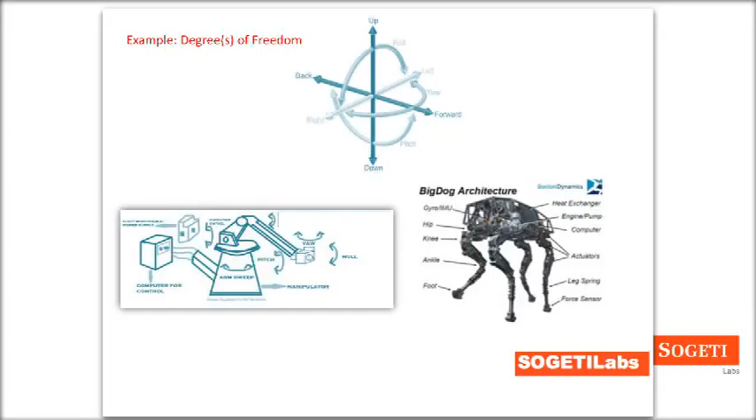But only 40, 50 years later, we have something like this BigDog architecture from Boston Dynamics, where this thing is basically a mock-up of a horse or a camel, a cross between creatures that can autonomously cover vast kilometers, carrying massive amounts of load. It has a gyro, knees, ankles and feet, and it can even negotiate itself on a frozen lake, keep from falling based on its sensors and pumps, and it's a very complex computer with very complex code.

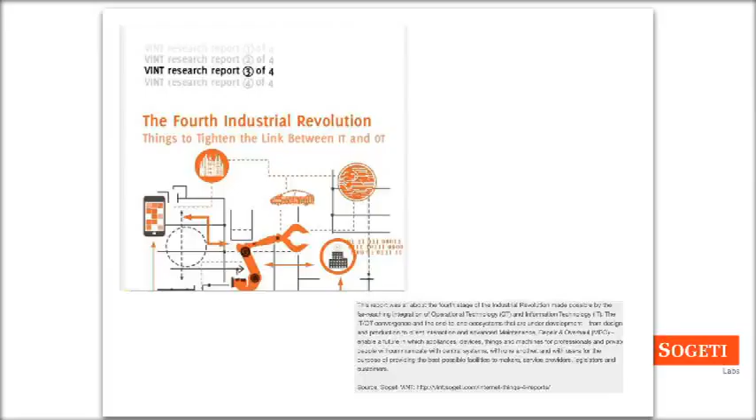A colleague of ours comes with this idea, which I think is fair, that technology is coming more to an invisible and intelligent way, seamless in the Internet of Things. But robots are kind of unique here - they're not going to be invisible at all. They certainly are going to be intelligent, and they certainly will be personal agents very related to the human side of things.

We're going to be using computers - it's really estimated that basically everyone will have a robot within 10 years, if you don't already. And these things will be pretty prevalent. So if you look at this from a TechnoVision point of view - TechnoVision is a way of looking at technology and grouping it.

Looking at the SogetiLabs Capgemini, the placing of robotics is kind of tough. It fits in the human experience side and the people side, because we certainly will be collaborating with robots. But robotics also really can be kind of taking...

Hang on, we have comments that... falling apart. Can we dial back a second? Can you restart from Technovision, see how we're doing? Yeah, no, sure. All of us slowed down as well. I think if I talk a bit clearer, that would be better.

So, placing robotics along this array of Technovision, which is a way of looking at technologies from both Capgemini and SogetiLabs together, we see that robotics can't really be placed into one particular corner, except for the possibility that it's not an invisible infrastructure, as I mentioned. It certainly is a system. It will be thriving on data. It will utilize a lot of data.

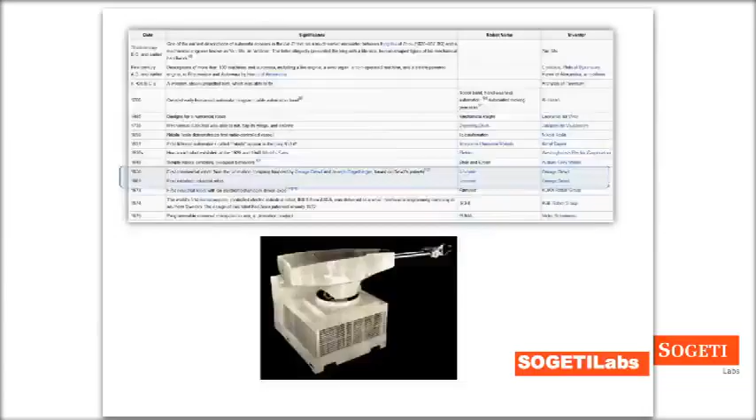Robots reach an AI capability... I think you're moving the slides back. Somebody's moving the slides back. Hang on, not me, really it's not me. I thought this was an interesting webinar, so I thought let's liven this up a little further. No, here you go, back to the slides. Please, somebody's pushing the slide buttons. Please don't push the slide buttons. That's okay, whoever's pushing it, maybe it's a robot.

Anyway, basically the robotics, certainly I place this in the UX experience. We certainly have a collaboration with these kinds of technologies, and this is very important to know. Of course, these things are designed for digital, but they're also very physical as well. So robots combine mechanical engineering, electrical engineering, and IT computer science engineering, and that's where the testing gets very interesting.

Next slide, please. So let's look at some of the testing challenges. This is an old look at the Elektro the Moto-Man back in '37, '38. What's funny about this is for the quality management of that system, where we'd be testing it, checking its quality, or looking at methods and processes, there's not too much different here than some of the more leading humanoid robots around today. There were motion sensors they postulated. The thing about smoking maybe wasn't as politically correct back then, so that was enough of a hassle. There were shafts. What they didn't quite understand would be the actual software and computers running this thing. This was purely a mechanical thing.

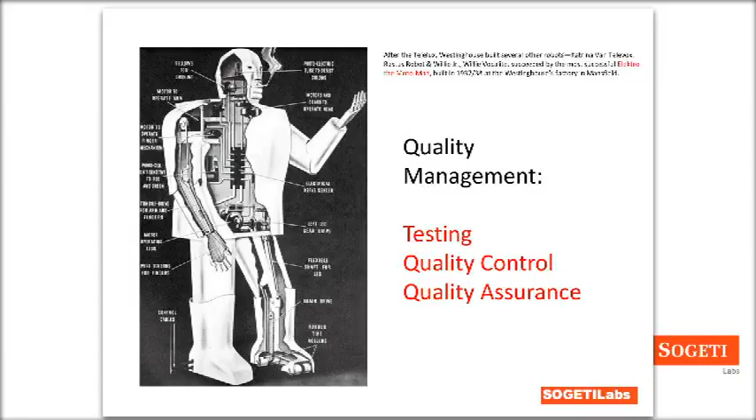Let's move to the next slide. So at Sogeti, we're no strangers to testing. We've devised processes for testing software. TMap is one, and I'd say TMap is a wonderful process, describing setting up phases in testing, where you have to plan your testing, prepare, specify, execute, and complete. But this kind of testing, along with business-driven and the toolbox, slightly falls short. I kind of place it with the 1927 picture of the robot. We understand processes and how to test. Robotics would require this as one dimension.

So this is certainly a valid dimension, TMap Next. A very important part is still the kind of thing you'll need to do when you test robotics. You'll need to check against specifications. But the thing is, it's not just a phased approach, it becomes very iterative, if not daily. Teams that work on robots at these, robots become almost like children, right? Everyone is working on one. Teams are working together for that one robot.

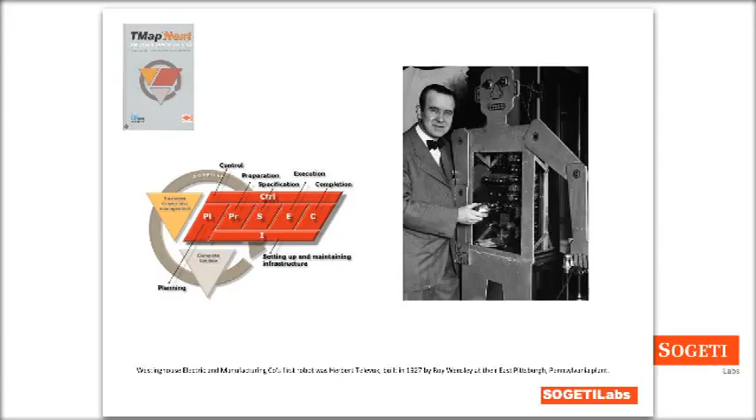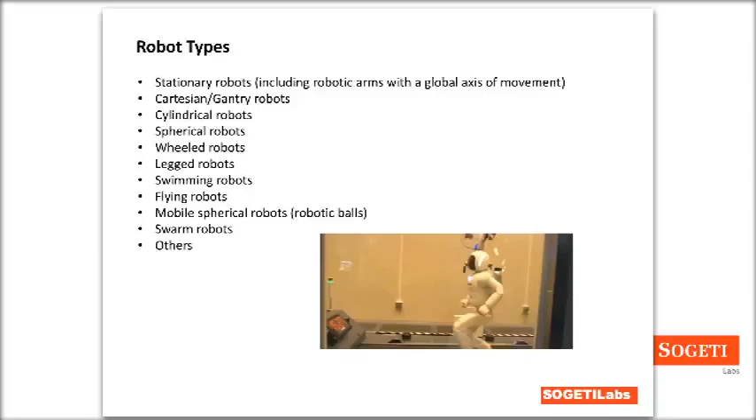You see robots have quite a lot of interesting elements. They have effectors, usually pneumatics or hydraulics or engines of some kind. They have sensors, so they know when they get data from their surrounding area. And keep in mind, they have something like software - this is where my IT testing comes to mind.

If I were on a robotics team, I suppose I could help with at least the third area. I'm not a pneumatic specialist, I'm not a specialist in sensors - I could learn that. But I certainly could test the brains of the robot, or perhaps today my brains need a bit of testing here.

What's interesting is that the Honda Corporation kept Asimo, that autonomous robot you see there, a secret for 10 years. No one knew about these labs, these testing areas. It's because they didn't want to get embarrassed with their failures, and also because they wanted to make the ERATO grants - interesting because with an aging population like in Japan, robots with human interaction are going to become more and more important.

Labor is very expensive, and the population is aging over the years - not passing away, but graying. The Japanese government has a Japan Science and Technology Corporation grant, giving grants to big companies to do this kind of robotic research. So there's money in robotics.

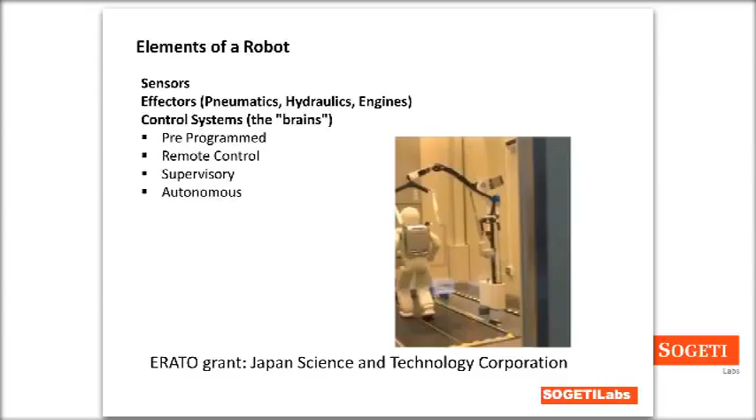Let's take a look at this interesting robot. Eric, unfortunately since I gave you the PDF, I have many more slides here for this robot, so you guys won't be able to see what I wanted to show you in my PowerPoint slide animations, but this is in fact Festo's BionicKangaroo.

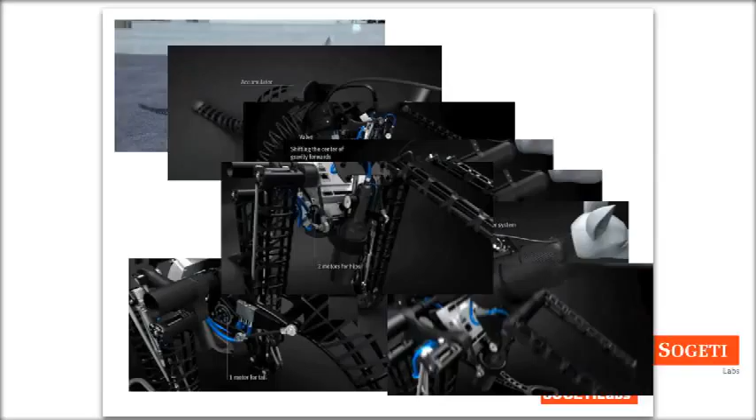Here you see some of the slides I wanted to show you. You see motors for its hips, you see the valves.

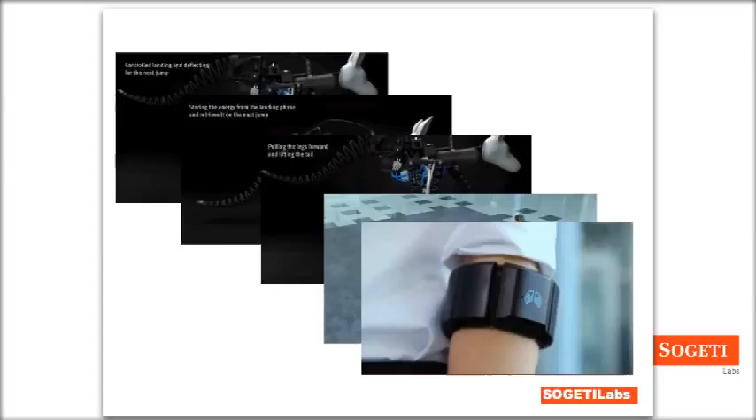The point to be made here is that the way we'll test these systems, and have to test these systems, is gradually, very iteratively. It's as if the different versions, like if you were testing software, if you were testing this version of this robot, you have to go through an evolution in itself.

Okay, let's go next. Yes, the sound's going to go in and out. Yeah, the sound is better now. Also, I disabled my fully automated backup solution to the cloud from uploading a couple of gigabytes while we were doing a webinar, so that maybe helps too. Keep going. Yeah, maybe we'll just avoid using the bandwidth. Sorry for any challenges in audio, folks.

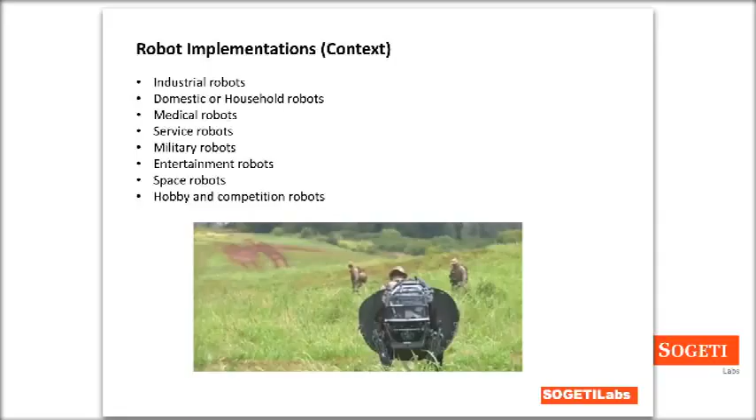Let's go a bit further. What robots do is the 3Ds: the dirty, the dangerous, and the dull work. Some people might think robots are depressing, or that they do the demanding work. But I think robots will be doing daring and dynamic work in the future, if not very interesting stuff, very human stuff, interacting with people.

Maybe you saw the situations in Paris. Maybe it'll be robots who will be helping to go in and take out bad people, or maybe it will be robots that will be helping us in the store, or helping us at the hospital, and this kind of thing. Okay, next.

So, since this is about testing, I'm not going to go into whether robots are good or bad, although that's a really fun discussion. Certainly, Asimov saw it as a step in mankind's ongoing advance. Is it something like here you see - I don't know if you saw Interstellar, but there's an incredible robot there in the film that plays a key part.

This is a very interesting robot rover on Mars, which is still working for humanity out there, finding stuff. There's lots of incredible technological advances. Testing this kind of thing would require the sciences backing up what those things are recovering. So you're not only going to have mechanical, electrical, and computer engineers testing this, you're going to have biologists and physicists and scientists programming to look for certain signs of life or certain things.

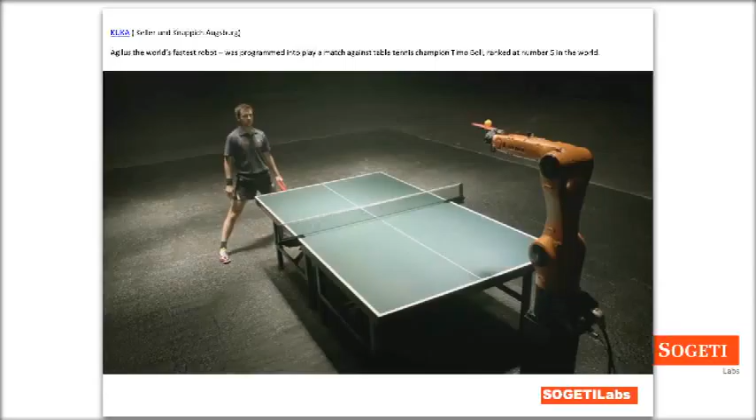That's where the robot started, that little arm back in 1958. And now with KUKA and Keller und Knappich Augsburg, this is Agilus, the world's fastest robot, which is programmed to play a match against this guy, Timo Boll. I recommend you go to YouTube and check it out, and I won't tell you who wins, but this robot is incredible with its artificial intelligence and how it plays against this guy.

What's interesting to switch to AI is, let's talk about robotics, but artificial intelligence is where it gets really interesting. This is a still shot from Blade Runner where Rutger Hauer's character actually is smarter than the people who made him. Now, what's always weird is we're taught in testing with black box that there's an input, there's something going on hidden, and there's outputs. But with AI, they take two approaches - there's like the top-down.

You build the brain first and try to make this robot think, then control its units, or you start making the framework of the robot, its code. Don't worry, it'll be a collective brain eventually. You could argue that we as humans went through evolution to have our brain work a certain way.

We do tests when we go to high school to show our tacit knowledge, implicit knowledge, or explicit knowledge. But robots, when we move to a door, we use 260 muscles. We walk, we see the door, we make calculations, and we do it. Robots need to be told to move all of those 260 muscles, told to open the door, and what that means—they don't conceptually or tacitly understand yet.

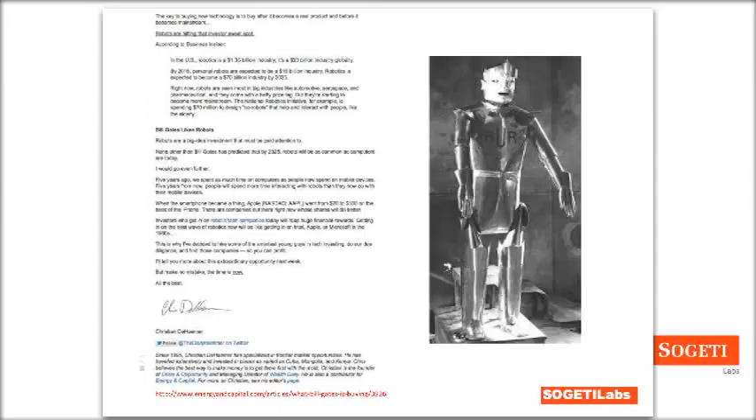I think I'll round off—I myself am speaking at Agile Testing Day soon, on the 19th of March, on 'We Are the Robots: Agile Testing for the Future,' so something I'm keen on talking about.